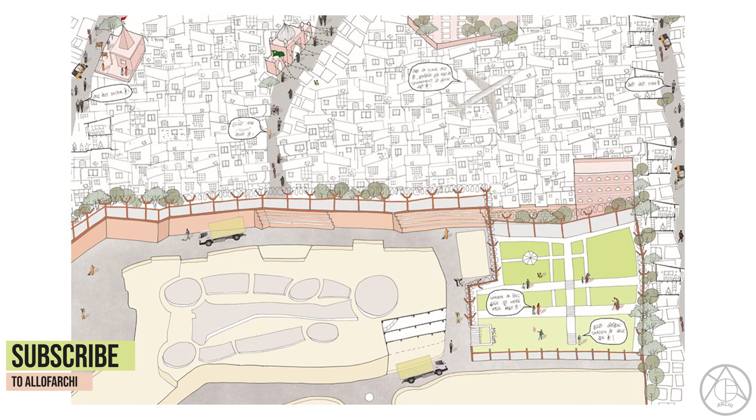The site selected was a fringe between the Phoenix Marketcity Kurla Mall and adjoining Sanjay Nagar and Qureshi Nagar informal settlement. The aim of the thesis was to develop a new model of infrastructure development wherein the proposed build form benefits the context of informal settlements of Sanjay Nagar and Qureshi Nagar by adding amenities that are deficit.

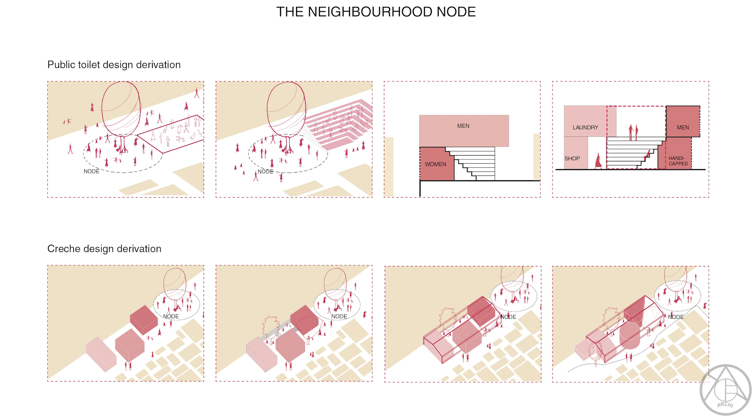The architecture here attempts at creating an inclusive and interactive interface between the formal and informal typology and its user groups. The design was conceived in three scales: the neighborhood node providing for the informal settlements, the community node as an inclusive ground between the formal and informal typology, and the urban node as the catalyst for development of public amenities in Kurla.

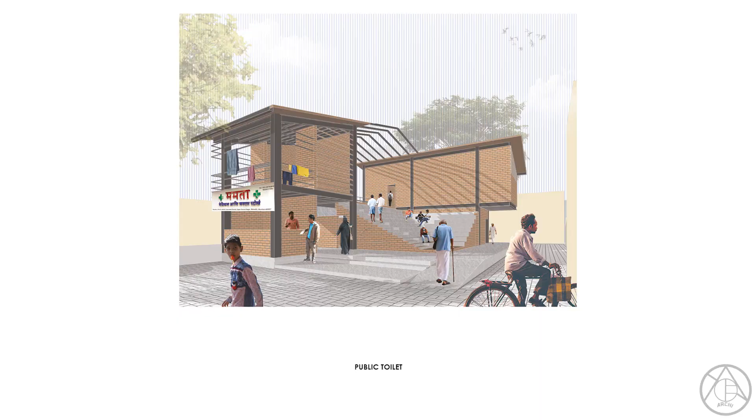Programs like public toilet, creche, training center, library, workshop areas, etc. were derived to provide for and bring about the development of informal settlements and Kurla at large.

The design framework involves agencies like BMC, CSR department in the process of construction under public-private partnership with the developer.

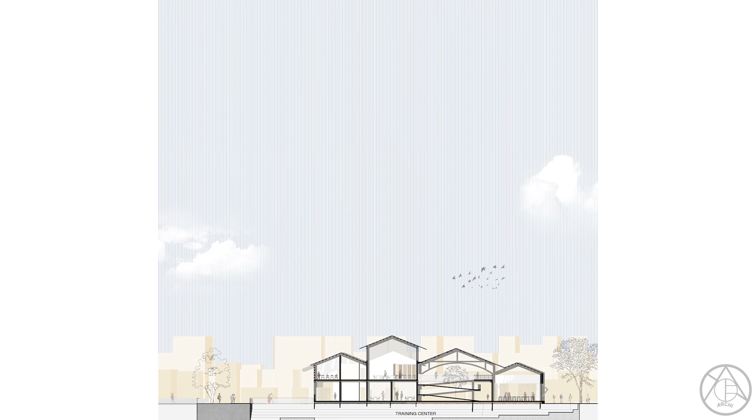Modular building materials were used, such as steel, which can increment the buildings in future as per need. Recycled construction materials were used for walls and cladding on the structure. Rainwater harvesting system and solar systems were implemented to make the building self-sufficient.

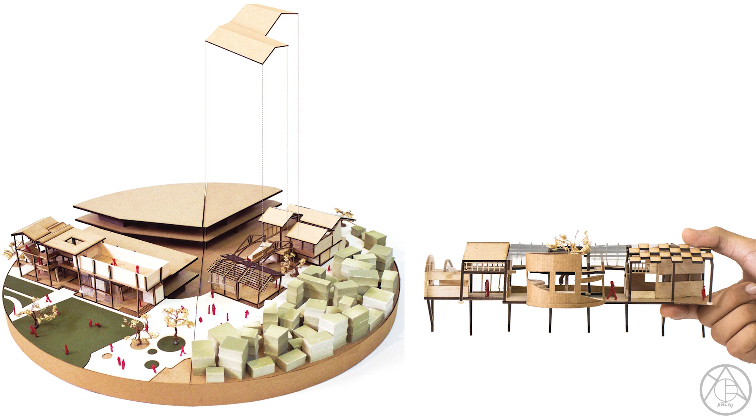Additional functions like advertisement spaces, rentable workshop areas would generate income to run the public amenities. These factors would enable community participation in the process of building.

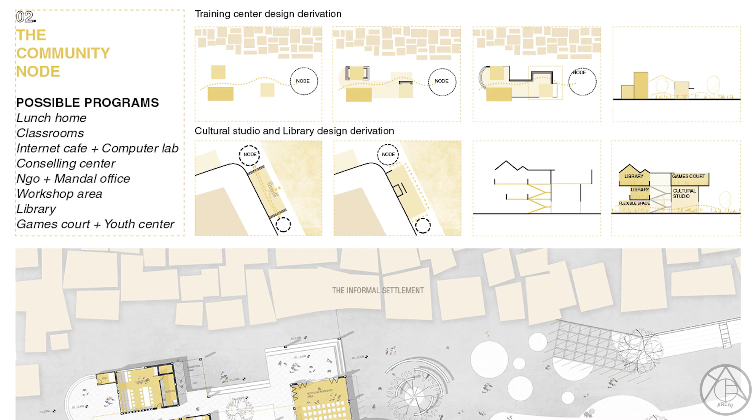The design creates architectural typologies that are socially integrated and self-sustainable. The architecture becomes a dialogue to transform everyday mundane programs into a progressive context for development. Thank you.